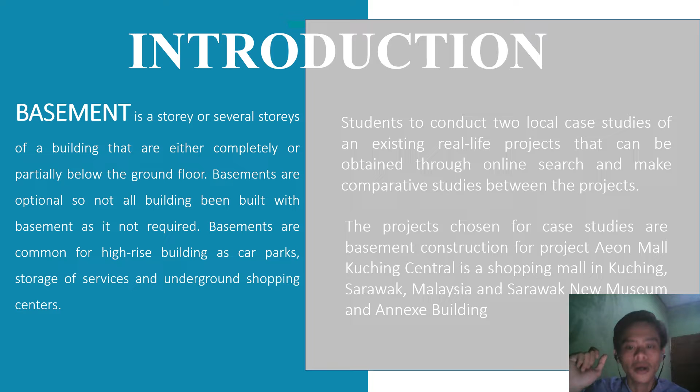Now we go to the project background of the first case study. Aeon Mall Kuching Central is a shopping mall in Kuching, Sarawak, Malaysia, located at Jalan Datuk Patinggi Ahmad Zaidi Adruce, formerly known as Jalan Kereta Api. It was opened in April 2018.

Aeon Mall has 3 levels of retail space and 4 levels of car parks. It is a 3-story shopping mall with a floor area of 52,000 square meters. Also, Aeon Mall Kuching Central has a large circular atrium with skylights at the center of the building.

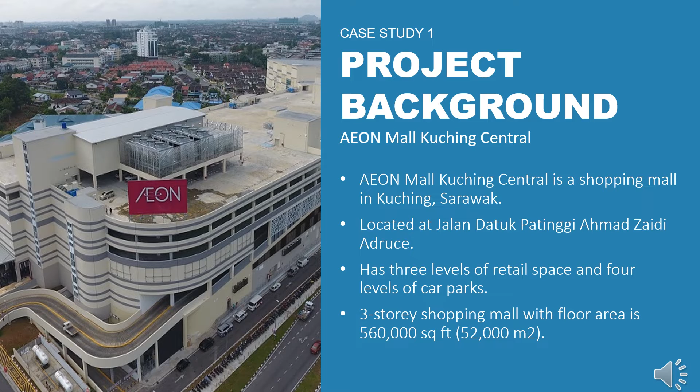Next, I will be explaining the type of basement that Aeon Mall Kuching Central is using. Aeon Mall Kuching Central is using top-down excavation. The basement construction is for the purpose of car park and services, and considering its location in an urban area with a lot of obstructions, top-down basement excavation is used.

It is suitable for two types of urban structure: tall buildings containing deep basements, and underground structures like car parks, underpasses, and subway stations. This type of basement excavation is preferred as top-down construction saves the entire construction time. The basement concrete slab functions as the lateral bracing for the perimeter wall system.

The parties involved in this project are as follows. The client is Aeon Co. Malaysia Berhad. The developer is KTS Holdings Sendirian Berhad. The architecture firm is IDC Architects. The project management consultant is Plus PM Consultant, and the engineering consultant firm is Jurutera Jasa Sarawak Sendirian Berhad.

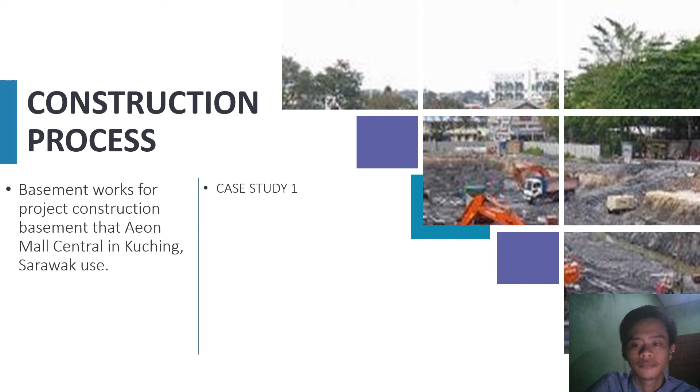Next, I will be presenting the construction process. For the top-down construction process, firstly, the retaining wall is constructed, then excavation and installation of steel struts, and then construction of the underground structure. After that, construction of the underground structure continues, and the next level of slab is constructed.

Next is the construction of the underground structure, where the side walls are constructed upward, followed by removal of the intermediate struts. Last but not least is backfilling and reinstatement: after the underground structure is completed, the soil is backfilled to the top strut level before the strut is removed.

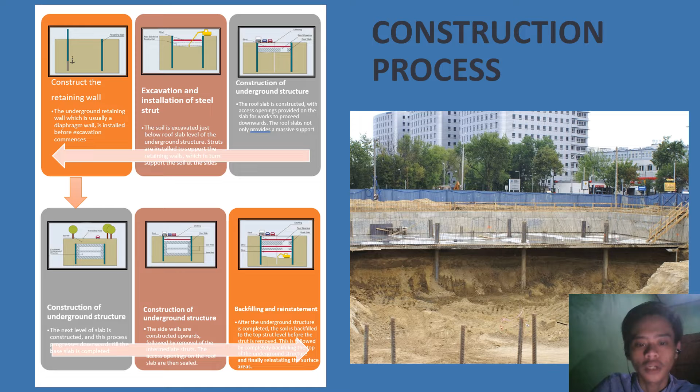Next, I will be presenting the problems and solutions that occurred on the site. Firstly, lack of safety at the site. The solution is to create a safe system of work for using and maintaining the machines to provide safety to the workers. Next is high cost. The solution is that proper planning must be implemented for the basement construction and the workers must do the work based on the work schedule to prevent over-budget costs.

The next problem is the transportation issue. The solution is that materials or any other machinery are to be transported during non-crowded hours, such as early dawn or midnight.

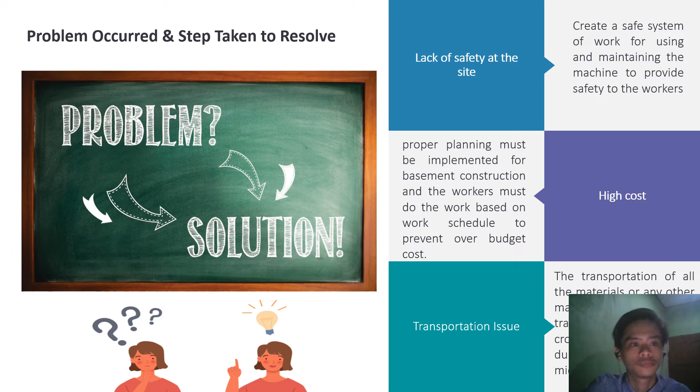For the second case study, we chose the Sarawak New Museum and Annexe Building. Now we go to the parties involved and their responsibilities in construction. The first one is the client. In the construction industry, the client is one of the most important parties in carrying out the construction process. They play an important role in initiating a project, providing the financial and administrative organization.

The second one is the contractor. The contractor is the person who is responsible for turning the client's needs into reality in accordance with the terms and conditions stipulated. Contractors are responsible for the entire construction process and selecting the best method to complete the project according to the specification.

The third one is the architect. Architects will be involved throughout the construction process, adapting their plans according to the allocated budget, environmental considerations, and client requirements. They are also responsible for the design of the work on an ongoing basis. The architect is also appointed under many standard forms of building contract as a contract administrator.

Next, the engineer. The engineer coordinates with the project manager to ensure that the project construction runs effectively and to monitor the life cycle of the project. They are also responsible to provide all project controls and update them as required.

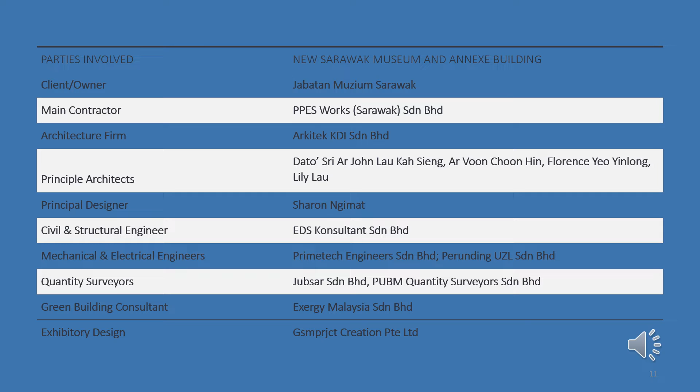Principal designer is Sharon Ngimat, civil and structural engineer is EDS Konsultant Sdn Bhd, M&E engineers Primetech Engineers Sdn Bhd and Perunding UZL Sdn Bhd. Quantity surveyors are Jubsar Sdn Bhd and PUBM Quantity Surveyors Sdn Bhd, Green Building Consultant Exergy Malaysia Sdn Bhd, and last but not least, Exhibitory Design, Gsmprjct Creation Pte Ltd.

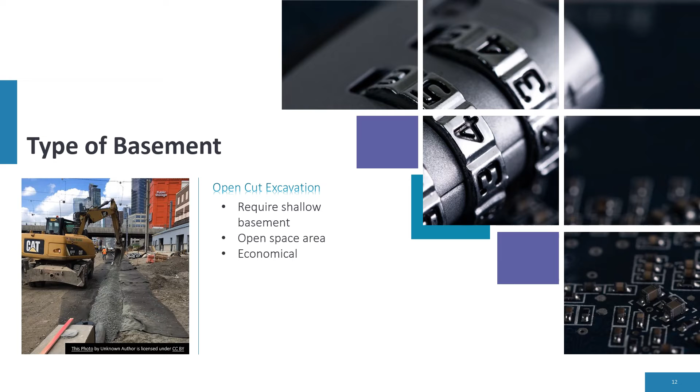I will explain to you the type of basement for case study number 2. The type of basement is open cut excavation. For application of this excavation, the site must be large enough because we do not use any kind of support to anchor the slope, and it must be suitable for clay to sand soil because of low soil settlement. It is a low cost method because there is no complicated action.

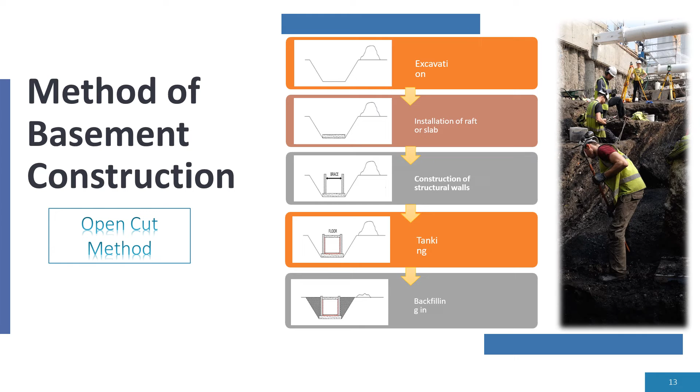Next is problems and steps taken to resolve. The first one is a confined construction site, because this case study is located in an urban area in the middle of Kuching city. Because the site area and space are limited, the solution is excavation done phase by phase to ease movement and avoid crowding and traffic at the construction site. After one work is executed, another work can enter.

Next is the transportation issue, because the road is rather busy as it is a main road used by a lot of people. The presence of heavy vehicles such as lorries and big trucks will cause a little disturbance to the citizens. So the solution is transportation will be done during non-crowded hours such as dawn, midnight or early morning.

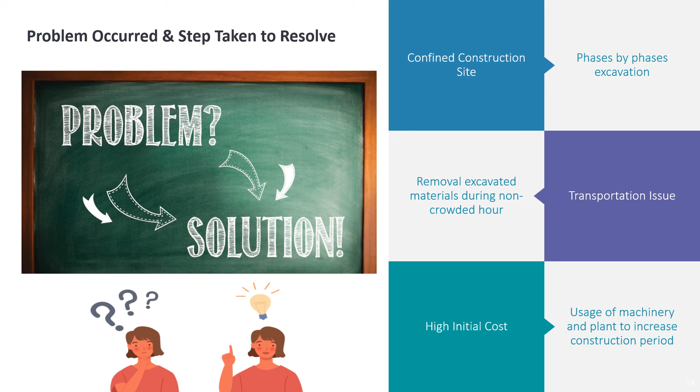Next is safety. For both case study 1 and case study 2, we use the same safety measures. The first one is PPE, personal protective equipment, providing workers full protective equipment from head to foot. For the head we get a helmet, for eyes and ears goggles or earmuffs, for hands gloves, and for clothing durable and nonflammable clothes. For our feet, we use safety boots, plus a safety harness.

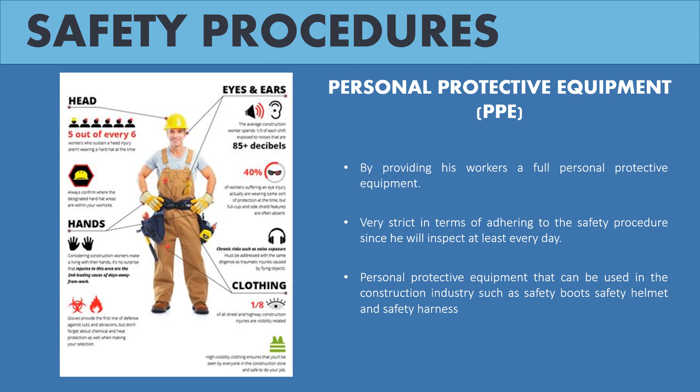Next, number two, we will provide suitable fixed access into the basement and access to the trenches or shafts. It means we will use a ladder or temporary lift shaft to carry loads or workers down into the site without any falls or accidents.

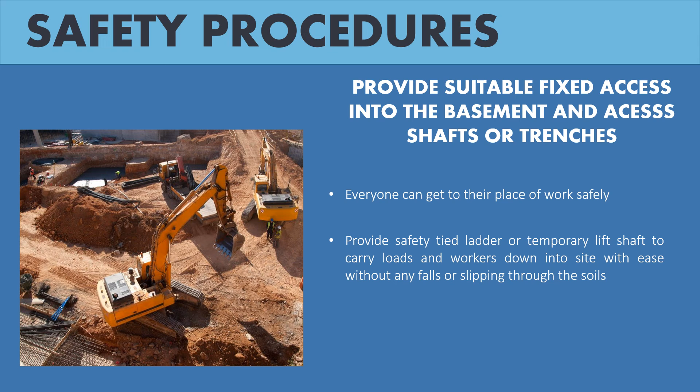Next is cleanliness of the construction site. Keeping the work site tidy at all times will prevent slips, falls, even death and accidents, because the project is located close to residential areas. The construction site must be entirely clean every day before leaving the site.

Next is tools and electrical equipment. The equipment will be visually inspected on a regular basis, because if equipment is found to be faulty or damaged, the electrician or the workers could get injured.

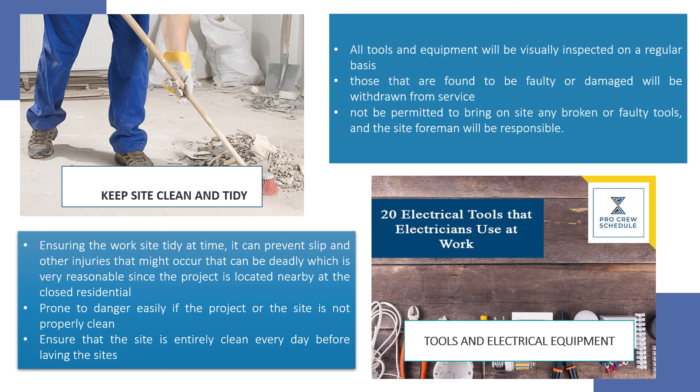Now we proceed to comparative studies between the two projects. Aeon Mall Kuching Sarawak is a private project, a commercial building, while the Sarawak New Museum and Annexe Building is a government project involving a public building. Aeon Mall used top-down excavation, while the Sarawak New Museum and Annexe Building used open-cut excavation.

Top-down excavation was used for Aeon Mall because of the confined space of the site. The advantage of this type of excavation is that it saves time, but it also has a higher cost. The Sarawak New Museum and Annex Building used open cut excavation because of its shallow basement excavation. This type takes a lot of time, but it is economical and cheap to construct.

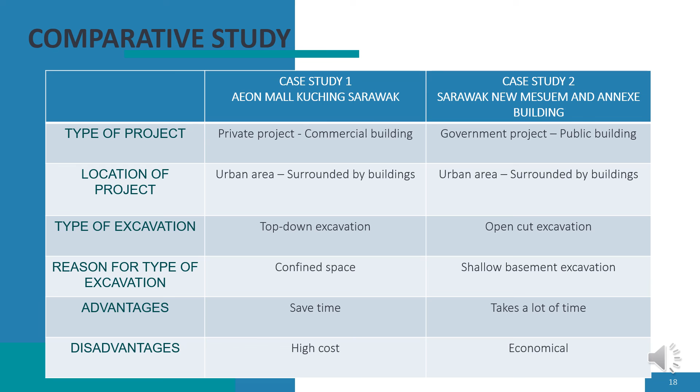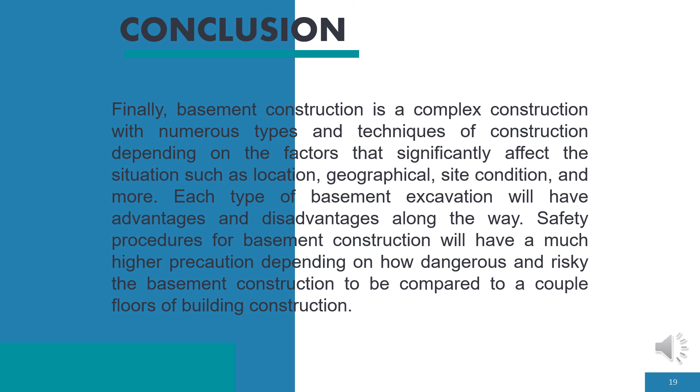For the conclusion, basement construction is complex, with numerous types and techniques depending on factors such as location, geographical design, site condition, and more. Each type of basement excavation has advantages and disadvantages. Safety procedures for basement construction require much higher precaution given how dangerous and risky basement construction is compared to a couple floors of building construction.